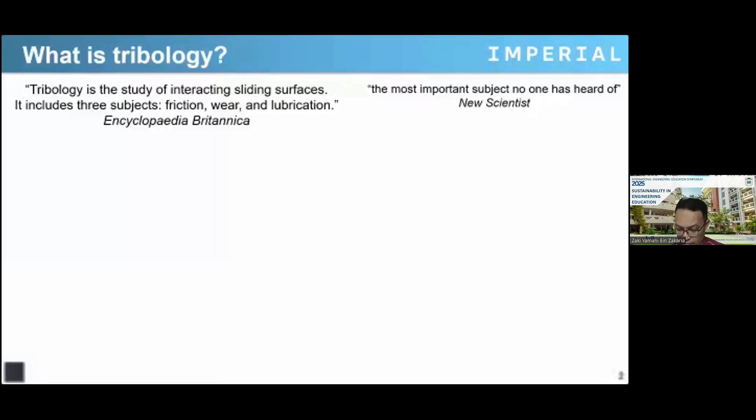Tribology, if you've not heard of it, is the study of interacting surfaces in relative motion. It includes topics such as friction, wear, and lubrication, and it's often misunderstood and not always even heard of by the general public, as this quote from the New Scientist highlights.

It has very old origins. The first recorded tribologist in ancient history is in ancient Egypt, about 1880 BC. You can see that while pulling large statues on sleds, the person at the front is pouring water or oil—it's debated which—in front of the sleds to help move them over the sand.

The first quantitative study of tribology was by Leonardo da Vinci, recorded in his notebooks. He came up with the classical equation for the friction coefficient, which relates to the friction force. This is usually attributed to Amontons, who was the first in more recent history to publish this equation, but it's more recently been found that da Vinci had it in his notebooks.

The word tribology itself is a relatively new term. It was first coined by Peter Jost in 1966 in the Jost Report, a government report that tried to quantify the costs of friction, wear, and poor lubrication to the UK economy. At that time, it was quantified to be between about 1.1 and 1.4% of UK GDP, and this number has since been validated and remains relevant in the modern economy. So it's a massive cost to industry and to society in general.

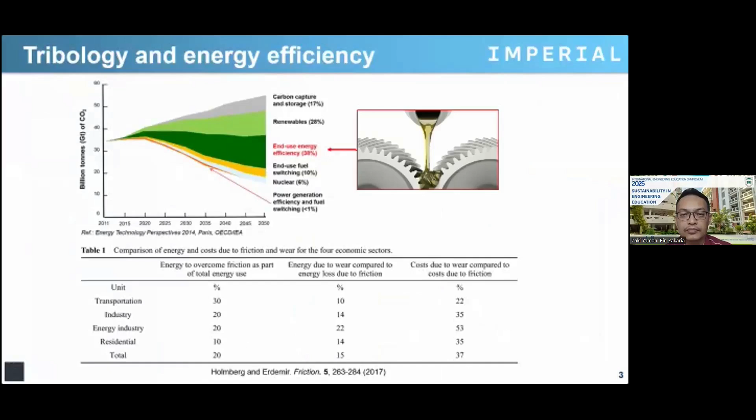A more recent estimation of the costs of friction and wear was done by Holmberg and Erdemir in 2017. They looked at the roles of friction and wear on primary energy use in lots of different industries, and estimated that between about 10 and 30% of primary energy is wasted due to friction and wear in these industries, of which transportation is a major one, and one I'll focus on in this talk.

In terms of tribology's relevance to the Sustainable Development Goals of the UN, it's obviously relevant to achieving affordable and clean energy, also to SDG 9, which is about industry, innovation and infrastructure, also responsible consumption and production, and finally climate action. So it's relevant to at least 4 of the Sustainable Development Goals.

Tribology is quite a complex subject. When you have surfaces in relative motion, there are lots and lots of physicochemical processes that go on between these sliding surfaces, and many of these occur right down to the nanoscale or even atomic scale. In order to understand macro scale performance in a tribological system, you often have to model or understand processes occurring at very small scales.

There are various techniques available to model sliding surfaces across many different scales, right down from the atomic level, where you're looking at atoms or even electrons, all the way up to continuum scale modeling, where you're modeling, say, a gear or an entire lubricated machine.

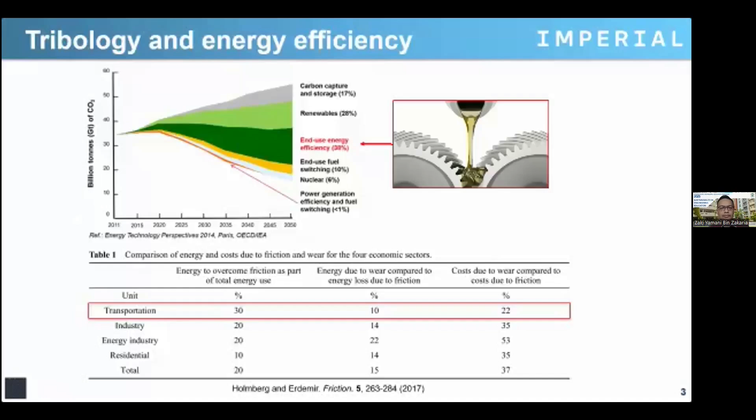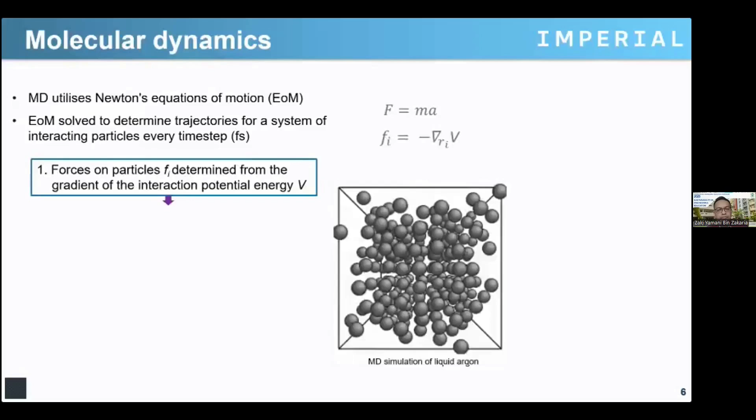You essentially go around a loop where you first determine the forces on the particles from the interaction potential energy between the atoms. You then calculate the acceleration vectors by integrating Newton's equations of motion. You then calculate new forces and accelerations and use these to determine new positions and velocities, and cycle around this loop to get the movement of the atoms in the system.

For molecules, you need a more complex force field to determine the interaction potential energy between the atoms and molecules. For classical force fields, this basically consists of bonded and non-bonded terms. You have bond lengths or bond angles that are usually determined with simple harmonic terms, and then torsion of the angles as well, so the 1,4 interactions to determine the twisting of the molecules, which is usually a Fourier expansion of a harmonic potential.

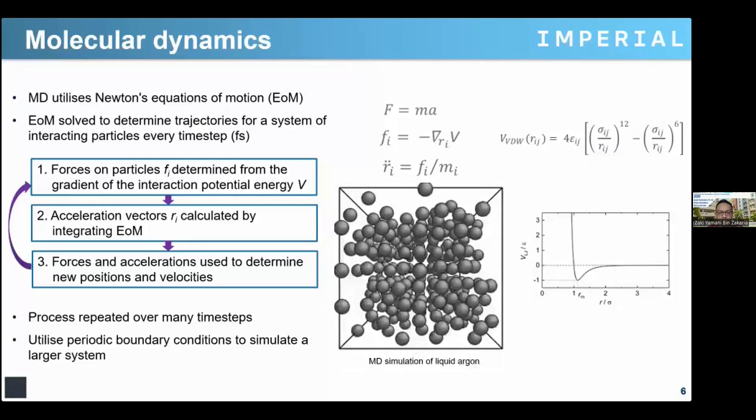In these simulations, which are non-equilibrium molecular dynamics simulations, lubricant additives are simulated between the sliding surfaces. A load is applied and the surfaces slide. You basically track what happens to the lubricant additives as they're compressed and sheared, as they would be in a lubricated contact in an engine.

To be able to break them down, we use something called a reactive force field, or ReaxFF, which is like the force fields I mentioned earlier, but has additional terms for bond breaking and bond formation, allowing you to look at the breakdown of these compounds and the formation of tribofilms.

Looking at what happens during these simulations, this shows the two different molecules, normal butyl phosphate and secondary butyl phosphate, and what happens when you compress the surfaces over time. You can see that these carbon-oxygen bonds break during the simulations, as do these phosphorus-oxygen bonds.

For the secondary butyl phosphate, it's more reactive and these bonds break quicker. You can also see an overall increase in phosphorus-oxygen bonds, which leads to formation of a tribofilm. So you essentially get CO cleavage, then PO cleavage, then PO bond formation, which leads to the formation of the protective tribofilm. You can see all of this happening in these molecular simulations.

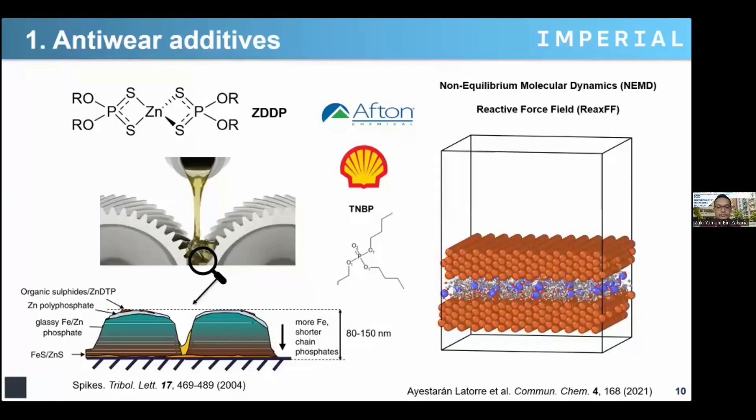You've also got the effect of temperature there, which is a standard Arrhenius relationship. As you increase the temperature, you get an exponential increase in the rate. So the reaction rate is exponentially dependent on both temperature and stress. You can see again the rates are much higher for the secondary, and they're more dependent on stress.

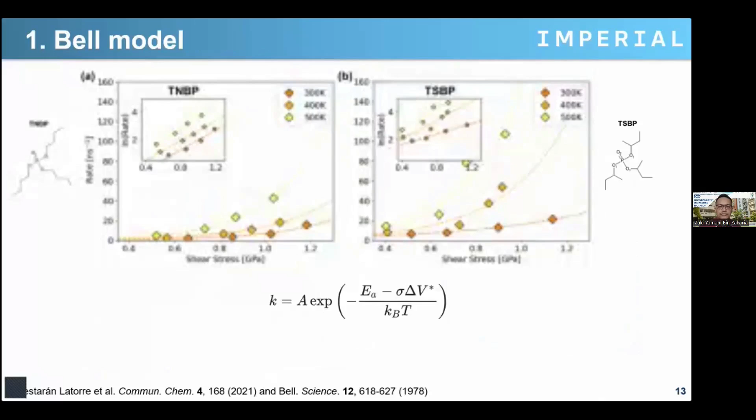You can then use these properties from the molecular simulations to understand what happens in real life. This is an image of a rubbing contact lubricated by ZDDP. You can see that in the circular area, where the contact's happening, you get a build-up of the tribofilm in the red area, but overall under this condition you get wear of the metal surface as well. The surface has been worn away in the blue area. You can start to model how this happens based on these activation energies and activation volumes.

You can use that as part of a mixed lubrication model at the macro scale to predict what might happen for different additives under different conditions, and start to predict what the tribofilm thickness might be, and what the wear of the surfaces might look like under different conditions with different additives. By doing this predictively from the molecular level, you can save yourself a lot of effort and cost with physical testing of new molecules.

Shifting gears, the second case study is to do with tribology and hair care. Hair care products have lots of roles as you apply them to the hair. They can assist with brushing and combing, improve the feel of the hair, repair hair damage if it's chemically damaged or damaged by the environment, increase shine or improve the look of the hair, reduce frizziness, and, in modern times, sustainable formulations are obviously another big thing with hair formulation that we develop.

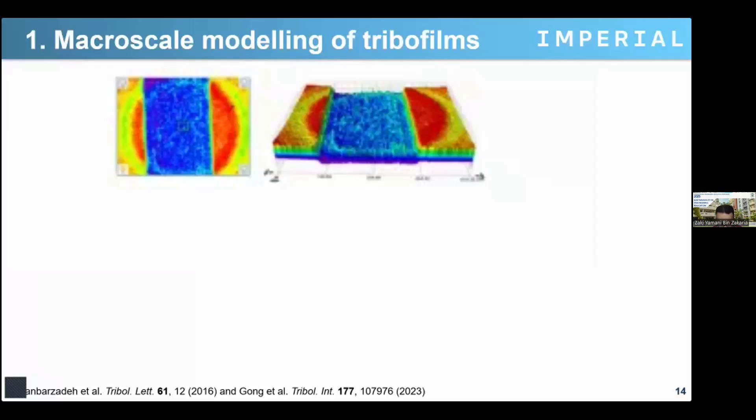So a key role of the conditioner is to reduce hair friction, and that improves the feel of the hair. Consumers, even untrained panels, are able to detect the changes in friction due to shampoos and conditioners. They can basically feel easily whether the hair is smoother, and this is a key role of shampoo and conditioner formulations — to reduce friction and make it feel nicer.

To model the hair, we basically need to know quite a bit about the structure. Hair has cuticles, which are microscale roughness features, overlapping scales. If you look into a single cuticle, it's got an outer layer covered by a fatty acid monolayer; the outer layer of the hair is either healthy, in which case it's covered by an 18-MEA monolayer.

This can happen by bleaching the hair, or even by natural weathering from the sun, or by other things. This layer can be removed and oxidized to form a cysteic acid group, which can negatively affect the friction of the hair.

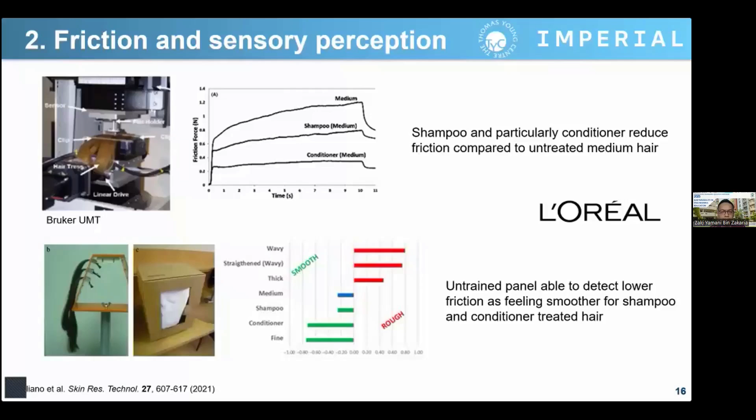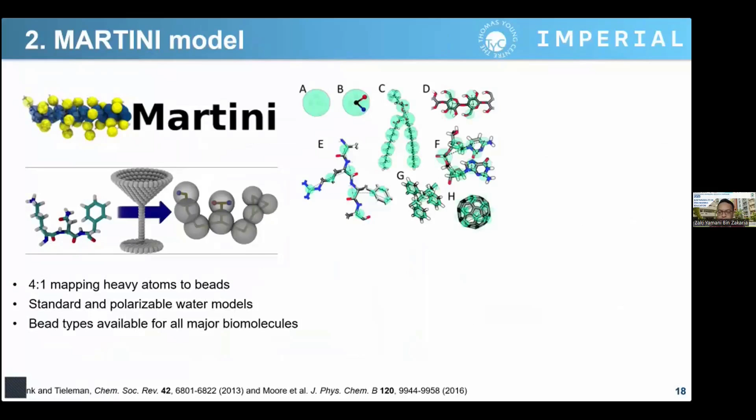So basically, in the models that we develop with Procter & Gamble, we have a coarse-grained model of healthy hair using the Martini model, which is a coarse-grained force field. To reduce computational cost, you group together atoms into larger beads, reducing the number of interaction sites and making simulations easier to run. There are lots of different bead types representing major biomolecules. It's been applied previously to study things like skin lipid bilayers and even entire cells, so we extended that to bits of hair.

Essentially, we have these 18-MEA fatty acid layers, which are represented with certain bead types. We then look at different areas of different levels of damage, where we remove a random fraction of these chains and replace them with negatively charged cysteic acid residues. We go all the way to full damage, where we remove all of these, which is equivalent to ultimately bleached hair, where you've removed all of the protective fatty acid monolayer from the surface.

In terms of the formulations and how we model them, a fairly recent phenomenon, certainly in the UK and I think other countries too, is sulfate and silicone-free shampoos, where you're replacing previous synthetic compounds that are very effective for lubrication of hair, but aren't sustainable and aren't naturally sourced. So consumers are increasingly interested in more sustainable or natural compounds, and Procter & Gamble and other companies are very interested in more sustainable sulfate and silicone-free shampoo formulations.

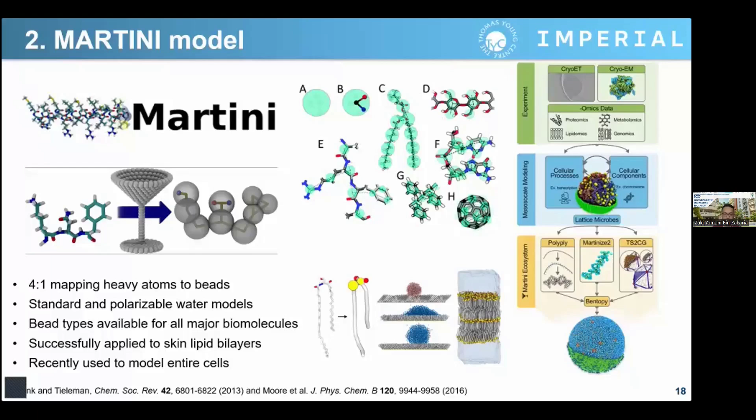One of those compounds that's very popular is cationic guar gum. This is derived from the guar plant, which is grown a lot in India and Bangladesh. It's essentially a natural gum that can be easily functionalized to form a cationic polymer, which is very effective at sticking to the negative groups.

For the cleansing part, it's typically anionic surfactants that are used to cleanse the hair. Here we're just looking at SDS, which is a well-known model surfactant. It's not one of the sustainable ones, but it's still used in quite a few formulations.

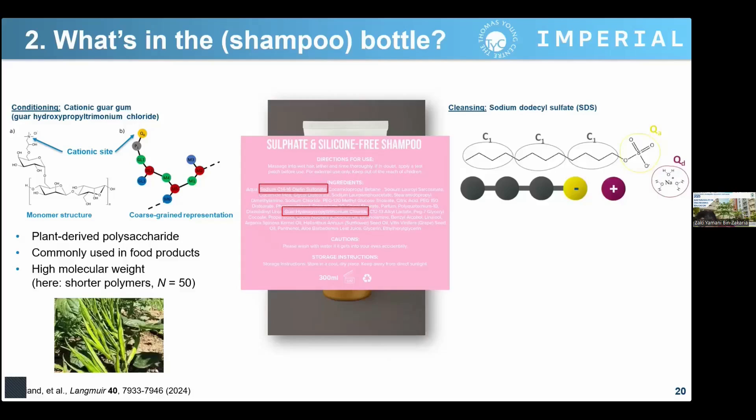Essentially, we look at the adsorption of these polymers onto the hair in a sequential approach. The orange part represents cationic polymers, and you can see that they adsorb onto the negatively charged surfaces. We then adsorb the SDS surfactant, which forms micelles. These micelles basically neutralize the excess positive charge of the polymers, so you end up with polymer surfactant complexes adsorbed onto the hair.

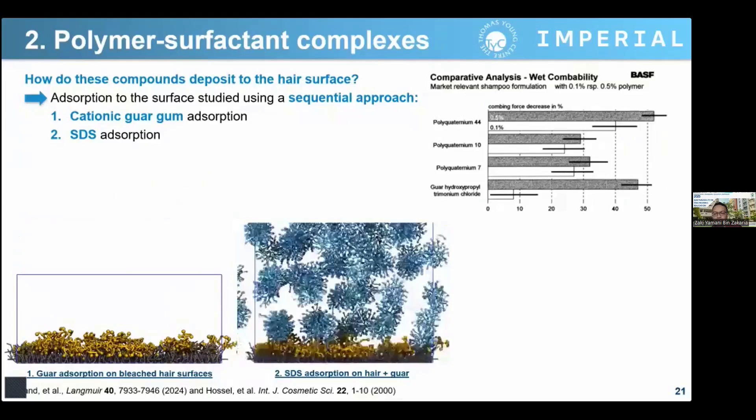We then apply a load, which is equivalent to physiological loads when you press your hair or rub hair between hair. You can see that quite a few of the surfactant micelles are then squeezed out, but some of them stick and remain between the surfaces.

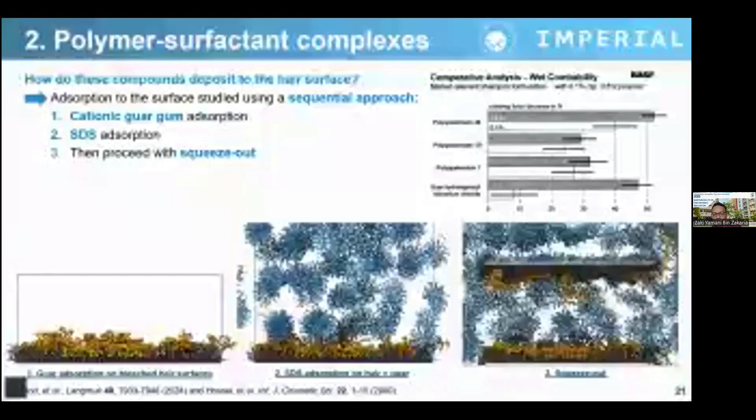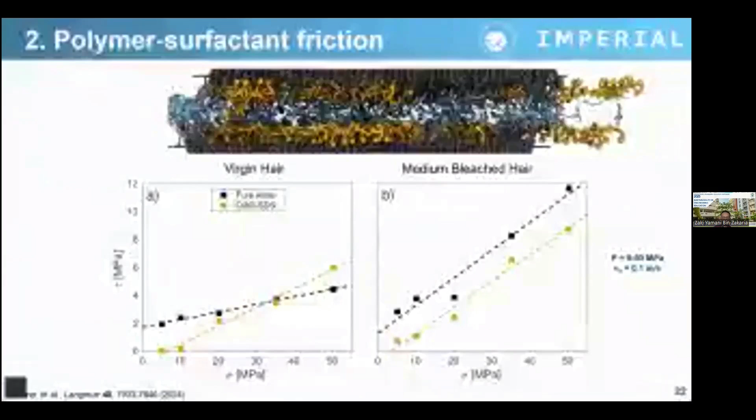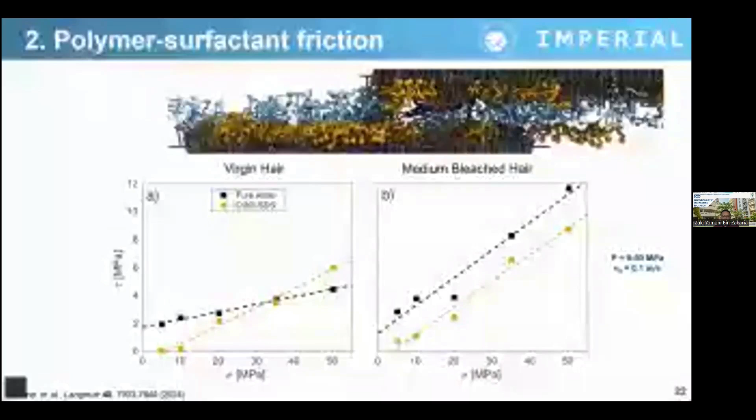And just to conclude, the academia-industry partnerships that we've developed here at Imperial are crucial to improve the performance and sustainability of formulated products, whether that be lubricants or even hair care.

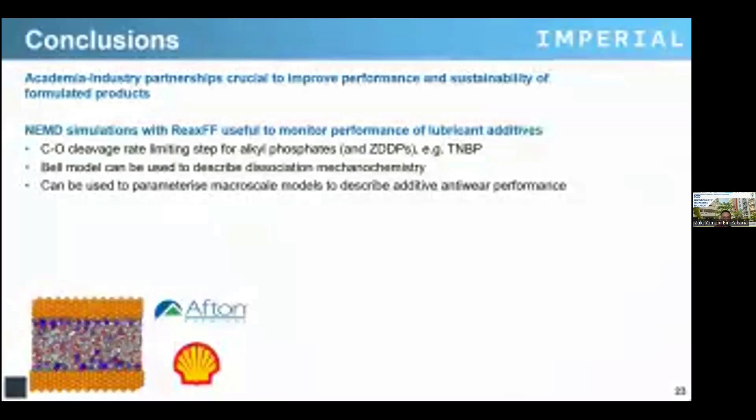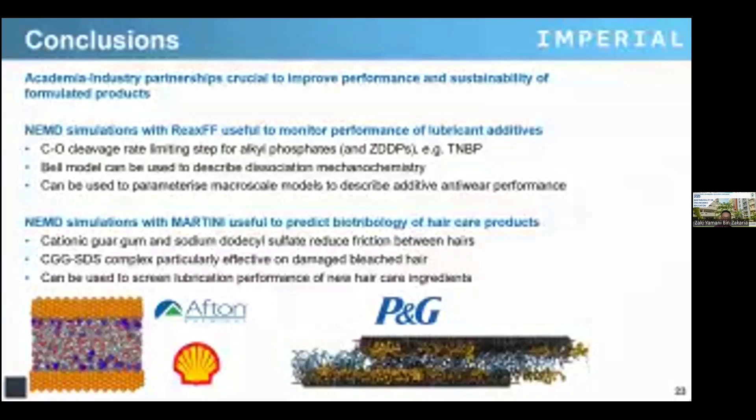I briefly showed how non-equilibrium molecular dynamic simulations can be useful to monitor the performance of lubricant additives inside lubricated contacts, and also showed how coarse-grained models are used to study biotribology of hair products, and how these can start to be used to screen sustainable alternatives to silicones and sulfates found in most current formulations.

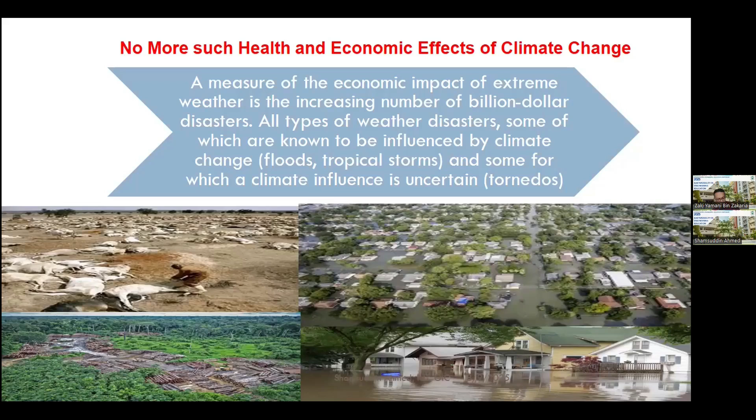Economic effects of climate change on humans and other beings, as we see in some pictures here - colossal damages are happening in this world almost every day. Many people are becoming refugees in different parts of the world because of climate change, and many animals and humans are dying, going under the water, and many things are happening in the world.

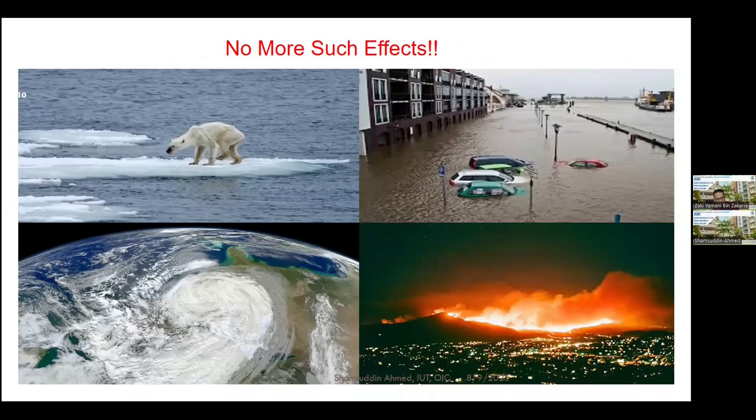With this background, let us speak about sustainable engineering. The contents of my presentation are: sustainable engineering at a glance, current state of engineering education, engineering stakeholders, innovative teaching methods, future directions in engineering education, measuring success, and conclusion.

So the summary is that sustainability is about justice for all. I understand that way - sustainability, justice for all, right?

So when we are talking about sustainability, rather about integration of various aspects in a holistic manner. As we say, engineering is going to play a dominant role all the time. Engineers use most of the resources and are playing a very dominant role in the world, creating facilities or products, developing systems, and many others. So they have a key role to play towards sustainability, and that must, of course, engage in engineering education.

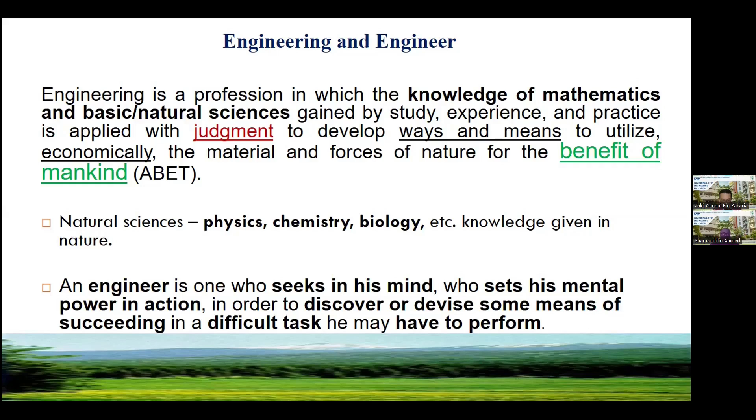So we would like to see that our graduates have that mindset that they would be working in any field towards sustainability. As we see the definition of engineering given by ABET, it is for the benefit of mankind - we use the knowledge of science and mathematics, and apply that with judgment, and that is also economically for the welfare or benefit of mankind. So engineers are working for mankind, and that's why when we are talking about an engineer - engineer is someone who seeks in his mind and sets his mental power in action in order to discover or devise some means of difficult task he may have to perform.

So engineers are giving, or should be giving, full attention towards everything in a holistic manner. So we see engineering designing products, manufacturing or producing the products, providing various kinds of facilities and utilities, and creating wealth or managing other resources. So that's why engineers are not only designers, they are planners also. They are producers or builders. They are problem solvers and decision makers.

And as I said, engineers are using most of the resources. So they are going to work towards something best - design something that is sustainable, develop some system that is going to benefit mankind, and use the resources in the best manner, but they are working under pressure most of the time.

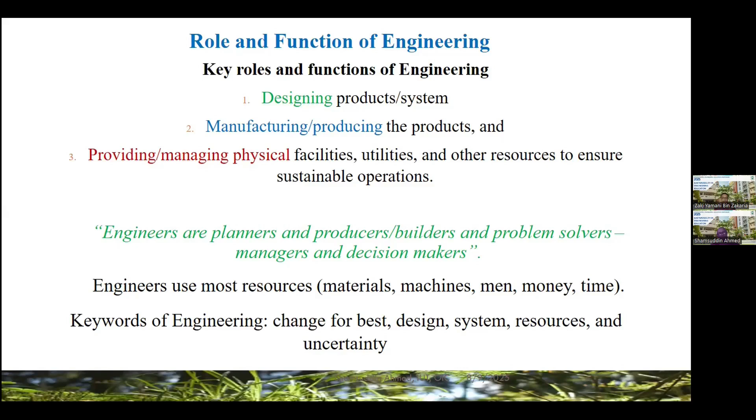Now we see that in sustainability in engineering, the key principle is that we are going to integrate environmental, economic, and social issues or aspects, and that will create, or promote, a resilient future. So engineering has essential significance for minimizing environmental impact, conserving resources, and fostering a resilient ecosystem, ultimately a viable future for generations to come.

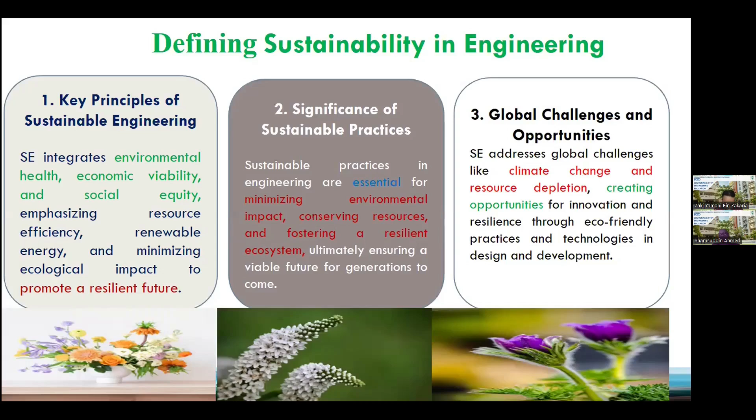Now we see that everything is done for development. We use this resource, that resource, for development. But if we talk about sustainable development and equity, not greed, it is possible with spiritual development. It is possible when our mindset is ready for sustainability. So then we think about human needs - we are going to satisfy human needs, and we are going to do it with some sort of social equity. At the same time, we must think about the limits of environment.

That's why when we are thinking about sustainability in economic aspect, social aspect, political aspect, environmental aspect, etc., in our mind the word sustainability should be there. So this is actually mainly a mindset - spiritual development is required for that.

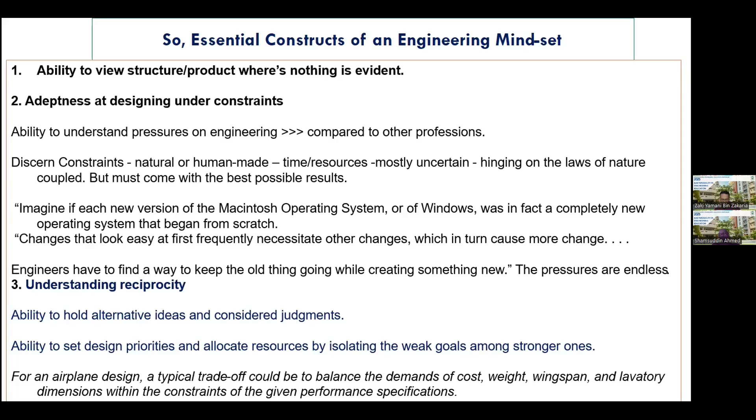So that's why the pressures on engineers, or on engineering, are tremendous or endless. And engineers must understand their outcomes or products. That's why judgment is very much important in engineering.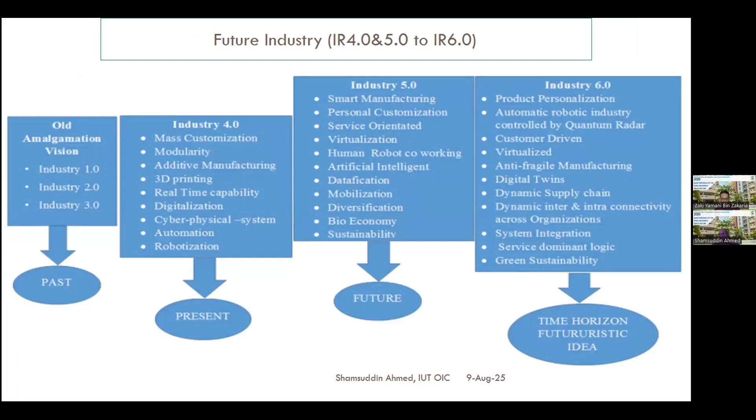As we are heading into Industry 4 and 5, we are heading towards agile production systems, or agile systems, in the future. So we are heading to Industry 6. There are different features or requirements to cope up with those kinds of realities. That reality is coming, and that reality must come - we cannot stop it.

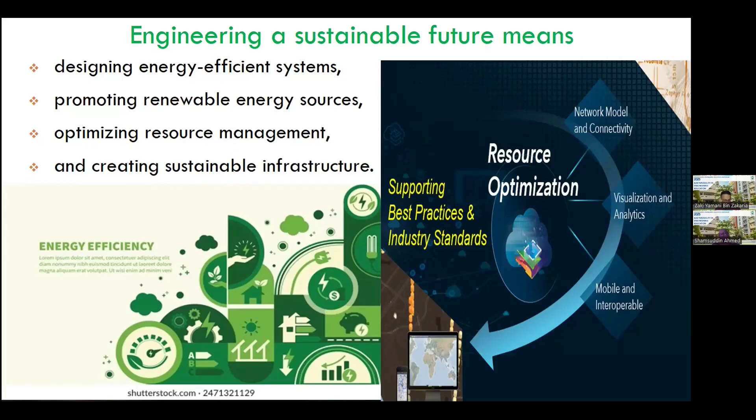So with this, we may say that engineering is going to design efficient systems, promoting renewable energy resources, optimizing resource management, and creating sustainable infrastructure. So we need to have different kinds of subjects or courses in order to fulfill the requirements of those things. Fortunately, we have most of those subjects in our curriculum. So we need to actually review the curriculum with sustainability or SDGs in mind. And that is possible - I think it is not tough to accommodate.

Future play a decisive role. So in terms of resource management and conservation, and reducing energy consumption by designing more efficient systems, and developing energy resources. Renewable energy, of course, are abundantly available, but now the question of harnessing with technology, new technology, or with new ways and means. So that is important.

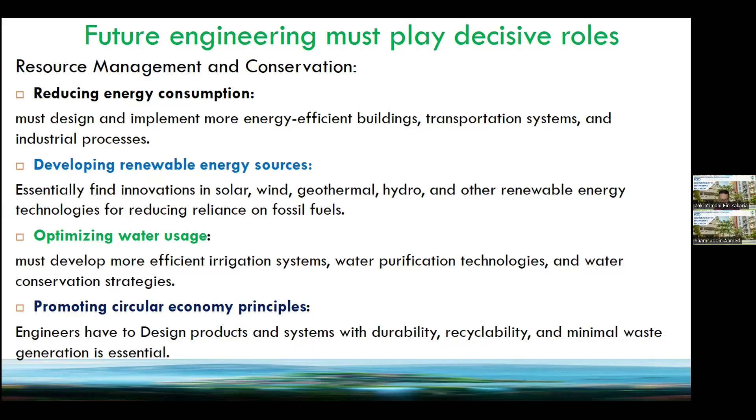So optimizing water usage is popular, circular economy that we often say these days. So that's why we are talking about remanufacturing, recyclability, or durability, etc. This kind of thing are now engineering keywords, right?

Engineering for mitigating climate change, developing carbon capture technologies, that is ongoing, but we need to actually capture more carbon from different kinds of emission processes. And that can be also used for some good purposes. And designing

resilient infrastructure, to face the extreme weather conditions that we often face now, earthquake, etc., and developing sustainable transportation systems that is generating the highest amount of greenhouse gases. So we need electric vehicles or hydrogen vehicles or other new types of vehicles that will actually release minimum amount of greenhouse gases.

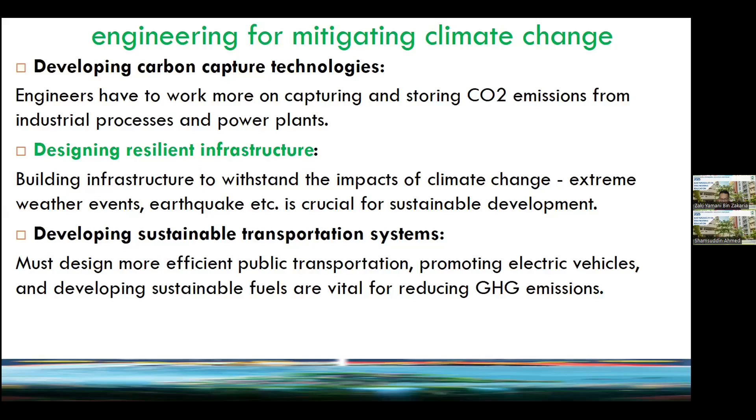So engineering for promoting sustainable infrastructure in terms of green building design, sustainable transportation networks, and waste management and recycling, that we have indicated earlier.

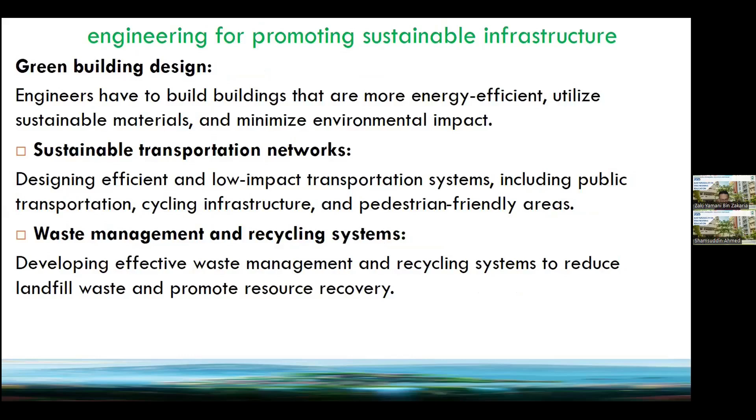Other points are clean water and sanitation for all, improving access to healthcare with new technologies, new devices, so that people are getting better health services. And in health services now, the significance of technology, in other words the engineering, is very much visible, much more visible than any time earlier.

Also agriculture is the basic sector, and agriculture engineering has a great role to play to increase the productivity as well as to minimize the waste in agriculture sectors. Currently, huge amount of waste because of harvesting and other kinds of systems that are too much traditional.

So future of sustainable engineering, as we know that AI and IoT for sustainability, or Industry 4.0 smart manufacturing, or we call wise manufacturing. These are the issues that are coming, and we need to have more biodegradable materials. And the important thing is about interdisciplinary collaboration.

So engineers, we need to work with other people. Even we need to change the mind of politicians. So engineers have a great role to play to actually change the mind of politicians towards sustainability, but by making them understand the significance of different activities that are going to work actually in a very cyclic manner.

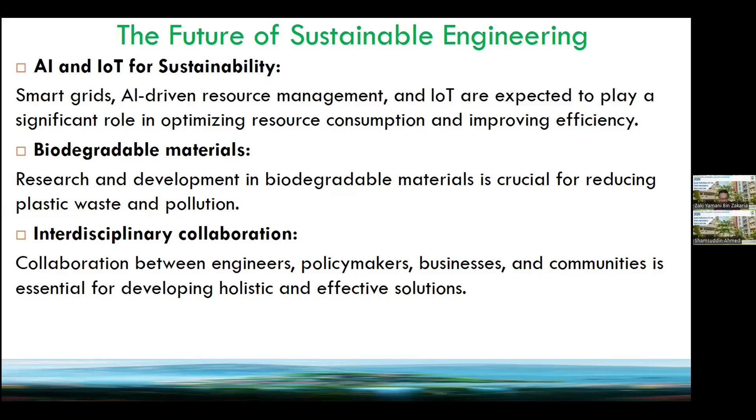If we take education, the philosophy of true education is love for humanity and ecosystem. So that is there. And if we talk about higher education or the highest level of education, this is knowledge, competencies, and skills. So one needs to do critical thinking and develop that kind of mindset, and responsive and reflective action is essential over there.

The role of education in sustainable development, educating future engineers - that is the background we have given thus far. So we need sustainable engineering that will integrate all these issues: environmental, economic, social considerations. If we take these three things, we are actually including all other aspects indeed. If we talk about the material, the system, process, etc., everything is going to be included over there.

So in the process, we need to create graduates who will inculcate such competence and skills, sustainable practices. Then they will be effective engineers in the days to come. And they will be engineers not only for one place, but engineers for all. So we need to think globally for our future engineers, that they are suitable everywhere.

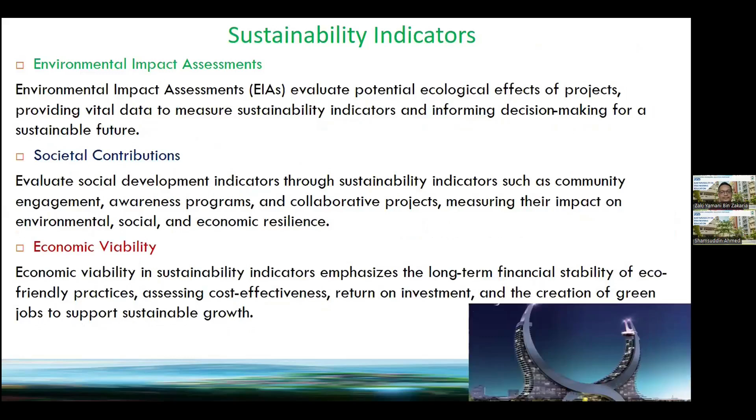Also, as I indicated earlier, involving policymakers and communities in our system is important, so awareness is very much needed. Interdisciplinary aspects are important, and internationalization—international collaboration across countries—is very important now. We need sustainability indicators from the environmental, social, and economic aspects, comparable for benchmarking countries or institutions, and then come up with new goals and new strategies. I am going to finish in a minute.

This presentation emphasizes the urgent need for a fundamental shift in engineering education by integrating sustainability principles, fostering a holistic mindset, and promoting active learning. We can equip us with the knowledge and skills to create a more sustainable and equitable future.

So empowering future generations is going to be the new vision, creating a society, and final thoughts and call for engagement of people from different disciplines. So future education should be all inclusive. Education should be brain, heart, and body instituted, learner-centered, a lifelong learning process with values for the welfare of mankind. So everybody should engage our brain, our heart, and our body, so that we come up with such a lifelong learning process to serve mankind.

And lastly, as I said in the beginning, sustainability in mind is like religiosity. So if that is there, then it will be wonderful. Thank you very much.

Thank you so much for listening to me. Dr. Iyer, Zaki Yamani Bin Zakaria, thank you once again for giving me this chance to speak in front of a very learned audience. Yeah, thank you very much, Prof. Sham.

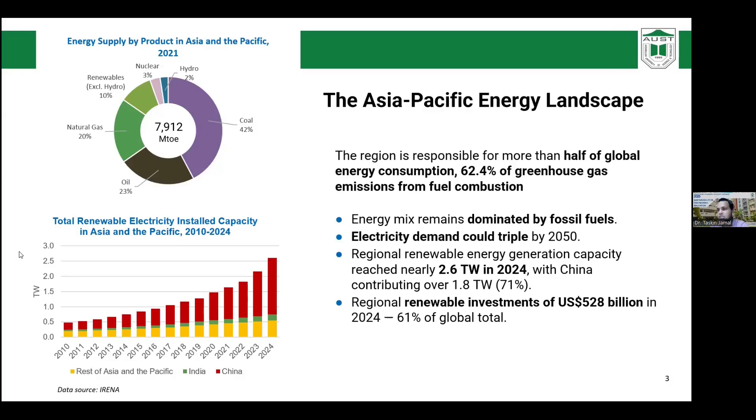Regional energy picture on SDG 7: Asia Pacific has made commendable progress, but two truths define the region's SDG 7 journey. Access to electricity is nearly universal, yet reliability and quality still challenge millions. Clean cooking, energy efficiency, and renewable energy integration remain uneven across countries and subregions in this massive region.

SDG 7 in Asia Pacific is not off track, but it is at risk of divergence, I would say. The gap between high-performing and lagging countries is widening. Without targeted, inclusive interventions, we risk inequality and missing the 2030 goal.

Now I move to discuss access to electricity. Asia Pacific's electricity access rate has risen. This is an extraordinary achievement for all of us. But let's look deeper: 67 million people still live without electricity, mostly located in large developing countries in this region.

Next is not just access, but the quality of access. For millions, electricity is still limited to a few hours a day or insufficient to power basic appliances or support livelihoods. This compromises household well-being, but also the delivery of essential services like schools, clinics, water pumping, and communications.

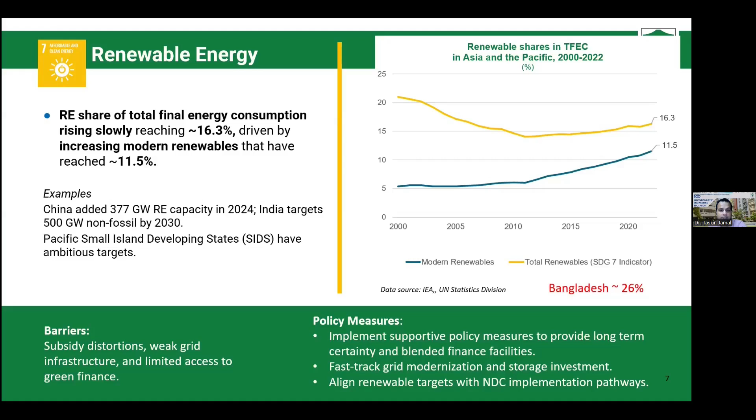Now I continue to show more graphs. What we see here is the regional totals. It's critical to ask how equitably is renewable capacity distributed across the countries and people. While the Asia-Pacific region leads in absolute renewable capacity additions, it lags significantly in per capita terms.

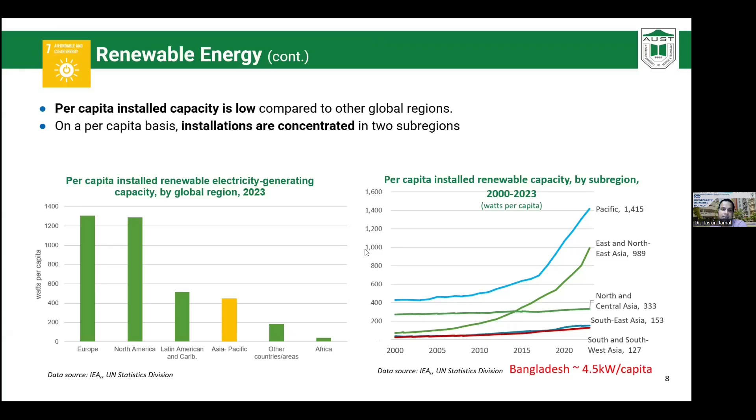Now talking about energy efficiency: if renewable energy is the engine of the low carbon transition, then efficiency is the gearbox, the mechanism that makes everything run smoother, cheaper, and faster. Despite its proven cost effectiveness, energy efficiency in this region is basically losing its momentum.

Between 2000 and 2022, the region achieved an average energy intensity improvement of just 0.9% per year. This is well below the SDG 7.3 target of 4% annual improvement.

To achieve gains, I emphasize strengthening energy efficiency legislation and compliance, promoting energy service company markets that deliver performance-based retrofitting, and expanding digital tools, smart meters, and demand-driven, demand-side management technologies.

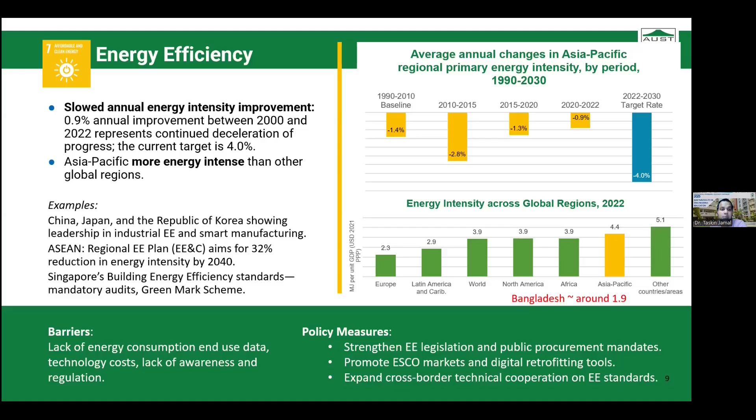Industry in Asia and the Pacific is both the backbone of economic growth and a major source of emissions. It accounts for a large share of regional energy use and nearly 40% of total carbon dioxide emissions. This makes it a priority area for decarbonization, but also one of the most difficult due to entrenched infrastructure, global dependencies, and cost structures.

Countries are modernizing their industrial sectors by embracing energy efficient technologies, automation, and AI-based energy management systems. Decarbonizing is not a choice between economy and environment. It's a strategic necessity for long-term competitiveness.

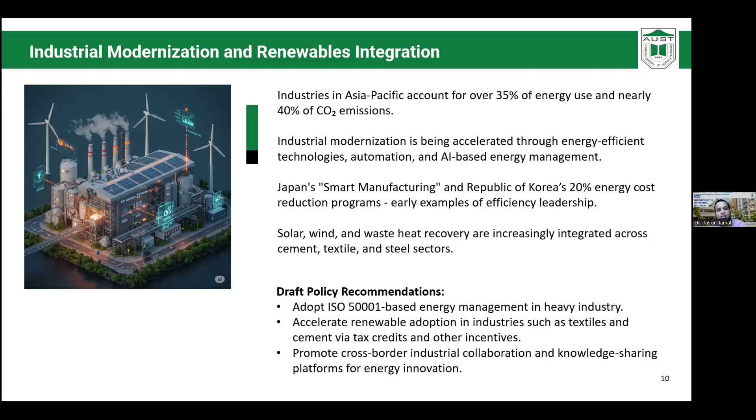Low carbon products will dominate global markets. Clean manufacturing hubs will attract investment and jobs. Countries that act early will define the industrial standards of the future. Asia-Pacific industries are rapidly evolving, and clean technologies are no longer an experiment. They are becoming essential for competitive, resilient manufacturing.

From 2005 to 2022, ASEAN countries and China, Japan, Korea reduced their industrial energy intensity by over 20%. That's a really strong start, but we need to go further and faster. This is where cross-border innovation diffusion becomes really vital.

We are seeing encouraging developments in this diffusion. Bilateral and trilateral pilots such as Japan-Thailand-Vietnam clean industry partnerships are testing digitalization and carbon capture integration strategies. India and Bhutan cooperation on green hydropower trade, and at the institutional level, platforms like the ASEAN Center for Energy, APERC, the SAARC Energy Center in South Asia, and ESCAP-IRENA partnerships are enabling knowledge training and joint road mapping.

These collaborations accelerate access to frontier technologies, pool financial and intellectual capital, and create a level playing field so that all Asia-Pacific countries, including Bangladesh, can participate in the green industrial revolution.

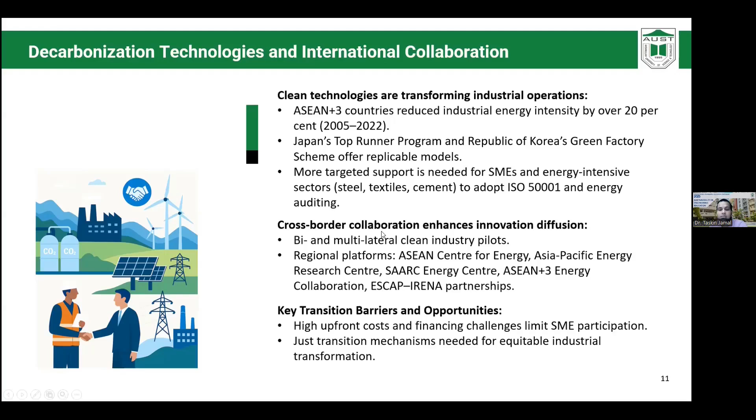Technical innovation is critical, but alone it's not enough. Without strong governance and inclusive planning, even the most advanced solutions will not deliver the structural change we need. Hence, let's focus on two key pillars: strategic energy planning, ensuring a just energy transition.

We cannot forget the shift away from fossil fuels disrupts industries, jobs, and livelihoods, especially in coal-heavy regions. The emergence of renewables, battery production, and green logistics requires new skills, new training, and social protection mechanisms. Across Asia-Pacific, including Bangladesh, we need to institutionalize just transition principles in energy and climate frameworks, invest in workforce reskilling, especially for youth, women, and displaced workers, and finally create dialogue mechanisms to build trust and accountability.

Three systematic enablers of the governance ecosystem that remain major constraints in Asia and the Pacific are data, finance, and regulatory frameworks. We need reliable, timely, and disaggregated energy data for planning, implementation, and accountability. But in many countries, real-time energy data is missing, especially at the end-use level.

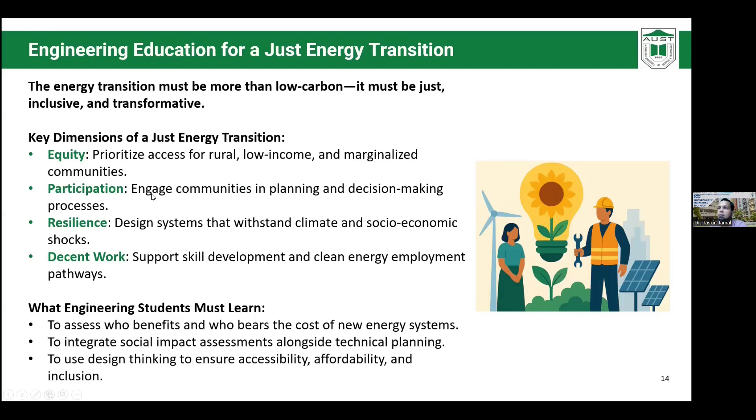If we want to build a just energy transition, we must start in our classrooms. Engineering education needs to evolve beyond the textbook, beyond the laboratories, to include real-world ethical grounding and cross-disciplinary collaboration.

Our curriculum must now embrace themes like rural electrification, clean cooking access, solar mini-grids, hybrid mini-grids, battery systems, and smart grids, and explore how they affect communities on the ground.

We should incorporate policy case studies from countries like India, Indonesia, Republic of Korea, Thailand, or Bangladesh, so students understand how energy systems interact with governance, finance, and behavior.

And we must train our students in the digital tools of the energy transition, like geographic information systems, which we call GIS, and artificial intelligence-based modeling, up to participatory commitment methods. This is not just about technical competence, it's about building a generation of engineers who are socially aware, systems literate, and also future ready.

The future of Bangladesh, India, Pakistan, Malaysia, Indonesia, Thailand, and all other Asia-Pacific countries will be shaped by our students, and it's up to us to prepare them for that responsibility.

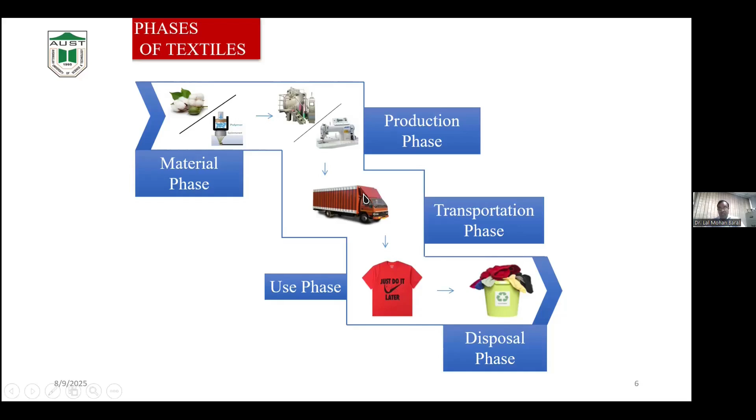Now I will give some examples regarding this phase-wise pollution. For raw material production, we use pesticides, and these pesticides are very much harmful, and this is one of the issues for sustainability.

Then think about the production phase. During production in the textile area, especially in wet processing, dyeing and finishing, we have to use a lot of dyes and chemicals, and due to this, the wastewater becomes pollutant wastewater. If you release it into the landfill or river, it will pollute the entire river. And if you think about the transportation phase, when you deliver this material to other areas, there is also air pollution and carbon emission.

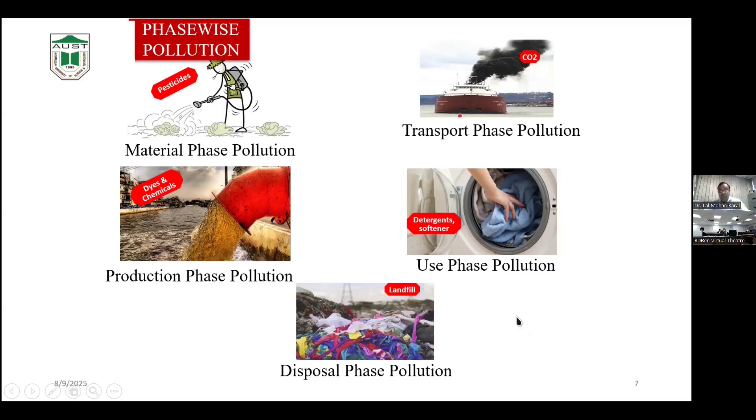And think about the use phase, using detergent and softener, which is also very harmful for mankind, and also the disposal after using the material. If you dispose of it as landfill or in any other area, it will also pollute the environment. So you can see, throughout the supply chain, different types of pollution are happening, and there are hazardous impacts in different areas from these different types of pollution.

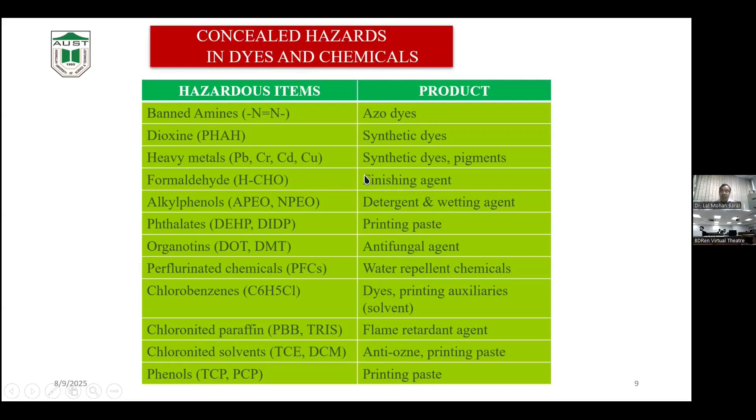Why is that happening? There are also some concealed hazards in dyes and chemicals. There are lots of hazardous items used in product development or production in the dyeing and finishing area of textiles. So in general, in these textile industries, we give inputs of water, dyes and chemicals, and textile fibers, and it's processed inside the industry. In the output, we get solid waste, and there's a lot of energy consumption happening. As byproducts, you get carbon dioxide emission, greenhouse gas emission, and also noise pollution.

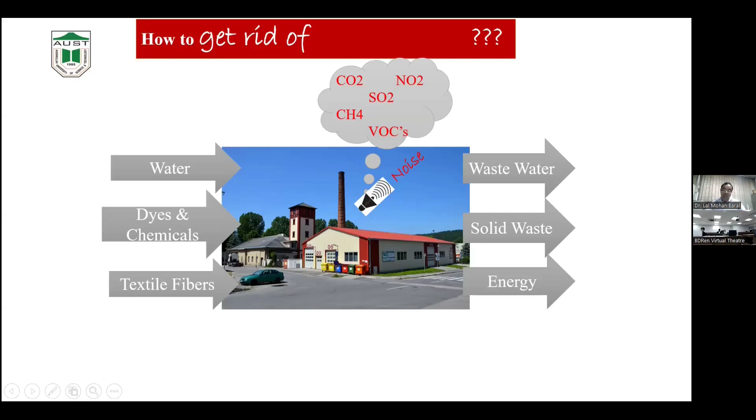All of this, if we think about sustainability, goes against sustainable environment and climate. How do we get rid of it? We have to think about the textile supply chain not in the previous traditional way, where quality and quantity came first, then profit. Now we have to focus on environmental issues, social issues, and then profitability. So we go from traditional to sustainable textile. How can we transform?

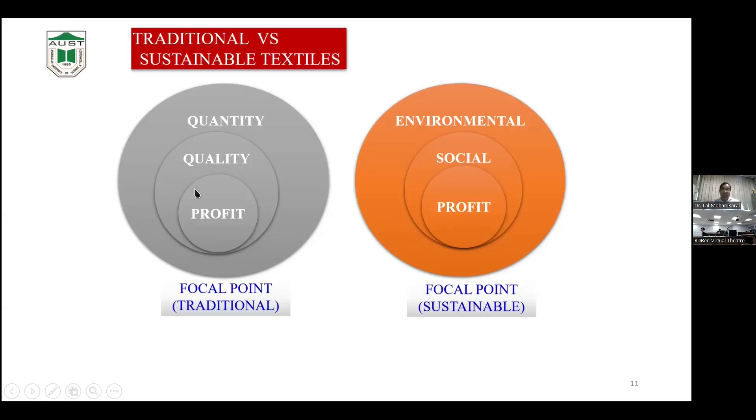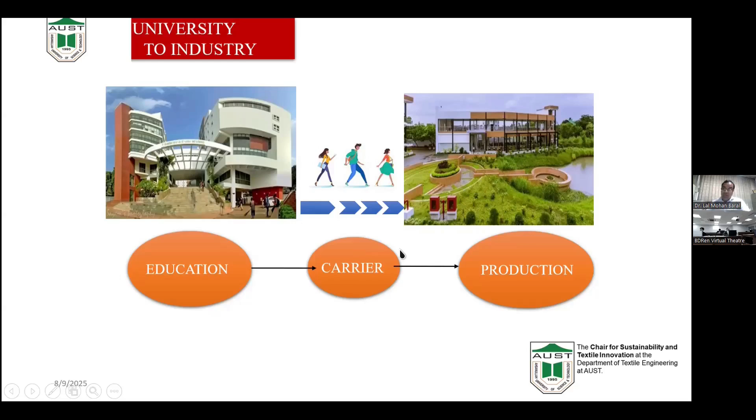We have basic education regarding sustainability, as it is very important in this sector. So we have to provide this for our students and their career development, which extends into the production area, where students can develop careers in sustainability and implement it in production.

To achieve this goal, we developed a project with university and industry collaboration. This was an international collaborative partnership project, from Bangladesh our university, from Germany Engelbert Strauss, a very renowned industry, and also UNU-FLORES, a renowned university situated in Germany, along with German cooperation. This collaborative project was named the Chair for Sustainability and Textile Innovation. Our main goal was to establish sustainability and textile innovation at the Department of Textile Engineering of AUST.

In implementing this, our basic goal in the BSc in Textile Engineering program was to develop our curriculum incorporating sustainability. As you know, our textile engineering program is a 4-year program, 8 semesters long, with a total of 169.5 credit hours.

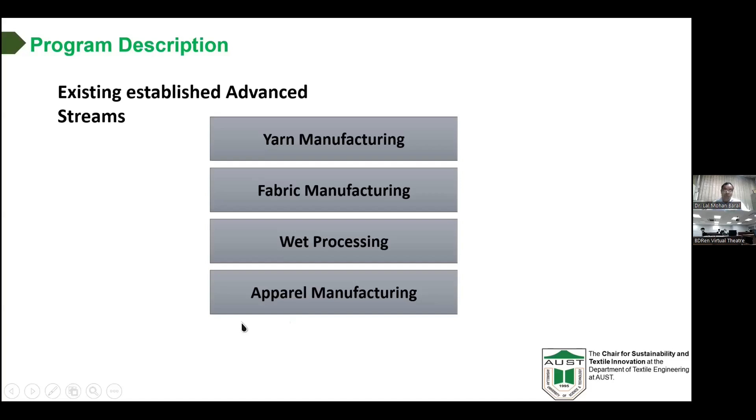Previously, our program had 4 advanced streams: yarn manufacturing, fabric manufacturing, wet processing, and apparel manufacturing. As sustainability is very important in our industry and in textiles, we started developing our curriculum to introduce a new stream called Sustainability and Textile Innovation.

Before going for sustainability, we had a gap analysis through a project funded by DAAD starting 2019, and surveyed what sustainability topics were already covered in our existing syllabus. We found a big gap, so we needed to incorporate sustainability issues into our curriculum.

Within that project scope, we modified existing courses to incorporate sustainability, and also developed a new course called Sustainability, where we incorporated different relevant topics into the syllabus.

As mentioned, our new stream is called Sustainability and Textile Innovation, where we focused on economy, environment, and society for textiles. It was focused on sustainability specialization, and there is also market demand among BGMEA members.

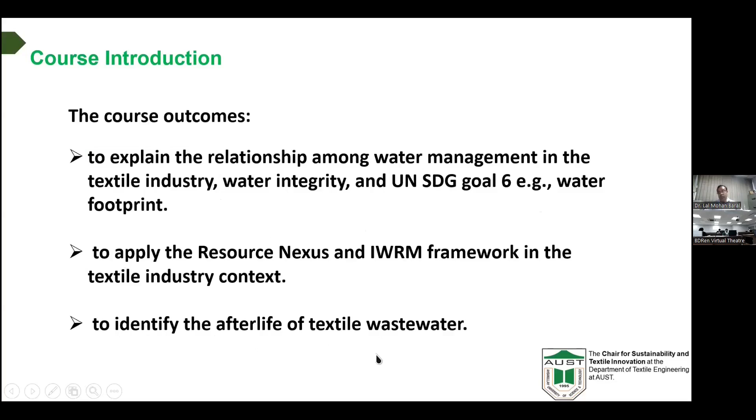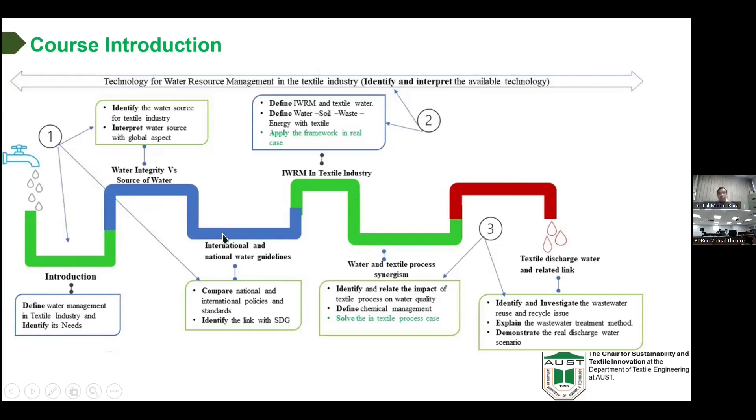In this course, we followed the entire textile value chain, from introduction to water integrity, meaning we bring in fresh water and disperse wastewater in total flow. We have incorporated measures for this into our syllabus.

This course also has some labs and learning objectives to improve efficiency of water uses, analyze the quality of wastewater, and perform wastewater treatment for different special sustainable transition tools in textile industries.

For the learning objectives of this course: to describe different tools - economic, environmental, and social - for sustainable organization, to compare the most sustainable textile business model with regular textile models for sustainability transition, to apply the tools of sustainability transition on creating sustainable structure, that is SOPs and different organization.

For this course we also followed the introduction, tools and techniques, measuring, calculations, and incorporated resource and their nexus in textile industries.

The objective is to describe the resource nexus approach in the textile industry, to execute sustainable production process, and to select tools, methods, and equipment to minimize the impact on environment and society throughout the textile value chain.

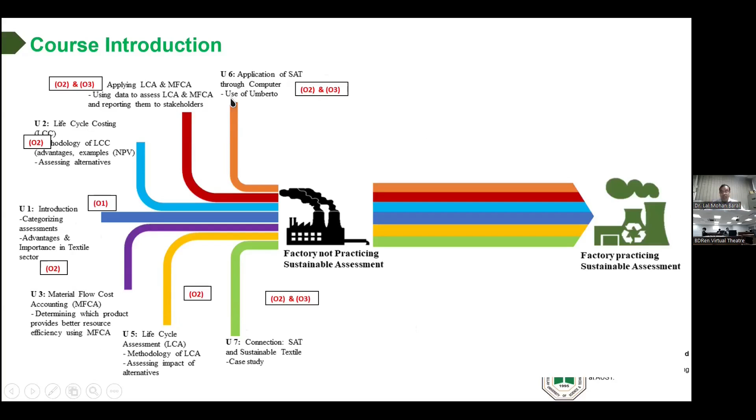With different computer programming, yes, all those things were incorporated. So with all this package of courses...

Actually we achieved these SDG goals from 5 to 13. In the next slide we can have a look at how we can achieve this.

This is a 3-credit hour course. We achieved or focused on SDG goals 12, 13, 8, and 5. The Sustainability and Textile Lab focused on SDG 12, 13, and 5.

Water management and textile industry, our focus was SDG 6 and 14. Special sustainable transition tools in textile industry covered SDG 7, 8, 9, and 12.

Resource and their nexus covers SDG 3, 7, 12, and 13, and its lab also covers 3, 7, 12, and 13. The application of computer and sustainability in textile industry is also 12 and 13.

Domains of sustainability - social, economical, and environmental - all domains are actually focused in this package of courses.